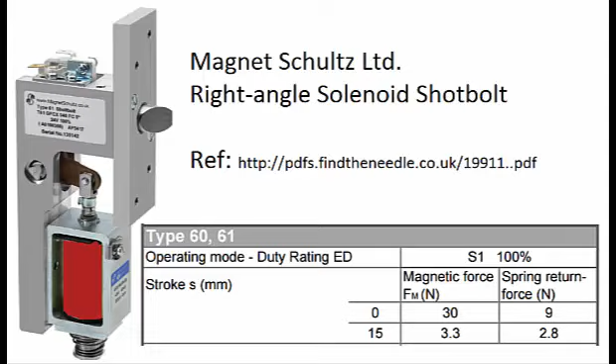So let's look at setting this up in dynamic simulation and see how we can make some adjustments and make all of this work. Let's take a look at this example of a locking mechanism.

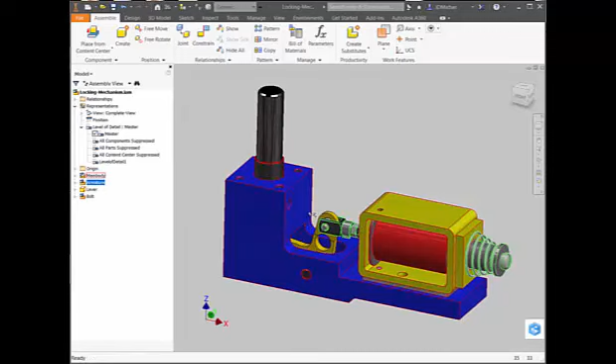So there's a solenoid, or electromagnet, that pulls on a lever which causes this plunger to pull back. When we pull on this plunger with the magnetic force, this locking mechanism opens. I've set a home position with it locked, and then when it's energized, it unlocks.

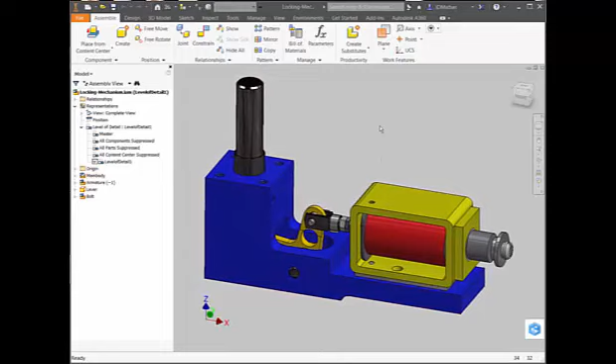I'm going to replace this physical spring with a spring force. So let's go to the model where that physical spring is removed, and then we will go to the dynamic simulation environment.

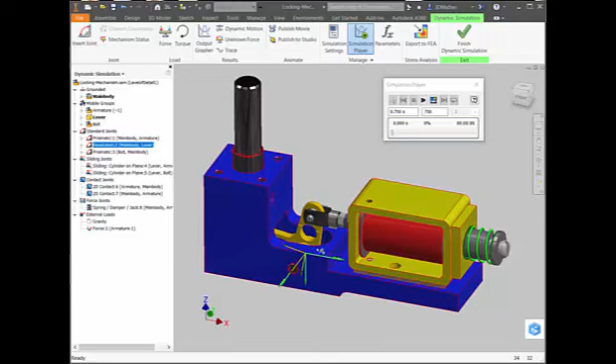I have 3 dynamic simulation joints. I have a prismatic joint for the solenoid, 1 degree of freedom, which translates along the x-axis. I have a revolution joint at the pivot point for this arm and for this lever arm, 1 degree of freedom, revolving around this axis. Then I have a prismatic joint for this bolt, so it translates or moves along the z-axis.

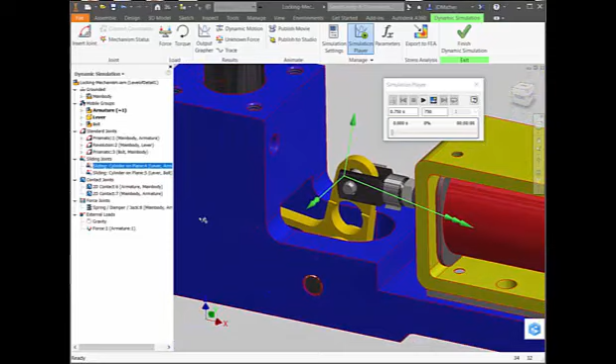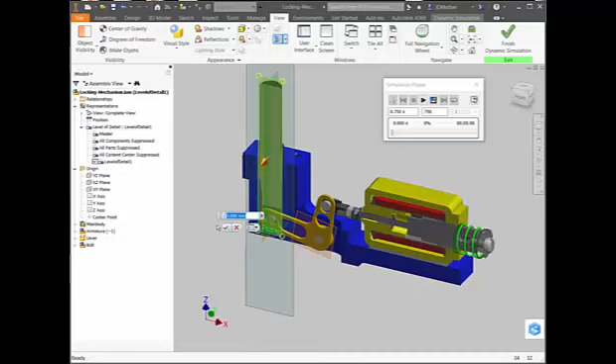I've put a sliding cylinder on plane joint between this cylinder and a plane inside of this lever, and it might be easier to see if I go to a section view. Let's go into a half section view—first I'll need to turn on some planes so I have a plane to select, do a section view of the assembly, and then turn off those planes. So I have a sliding cylinder joint up here, and then a second sliding cylinder joint here where this pin in the lock slides along that slot.

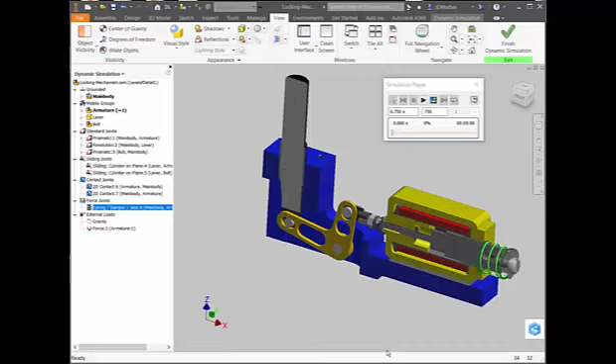I've added a spring force here to hold this plunger out until the solenoid is energized, and then it will pull that in. I've put a preload on this spring, which we'll talk about in a little bit. I can adjust the preload on the spring by decreasing or increasing the distance from here to here, and of course, in the real mechanism, you would do that by turning this screw.

I have a 2D contact to limit the motion, so that when it pulls the armature back, it only goes till it hits a stop in that direction. Then I have another 2D contact so that when the solenoid is energized, it stops when it reaches this face right here.

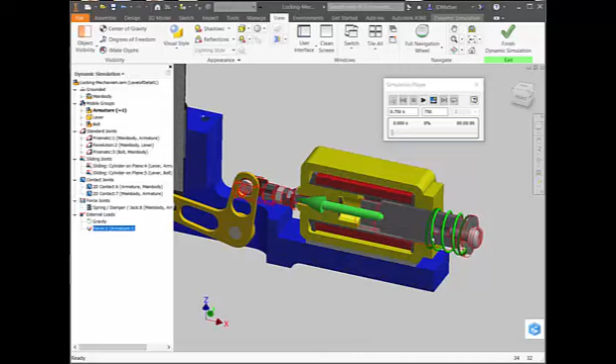And then I have the force that I put in for the magnetic coil. Let's look at those. This force is pulling in this direction. The force for the spring is going to push between this space and this space, so the end result, since this is constrained, fixed in space, is it's going to be pushing in this direction. The main body is grounded in space, so the force of the spring will push in this direction—opposite from the force of the armature that holds this closed, or the armature out when it's not energized. When the armature is energized, it pulls against it, overcomes that spring force, and brings the armature in.

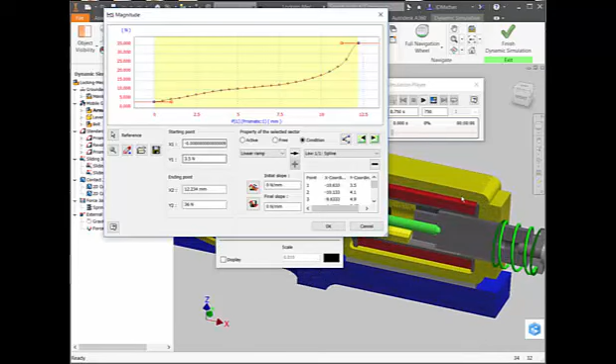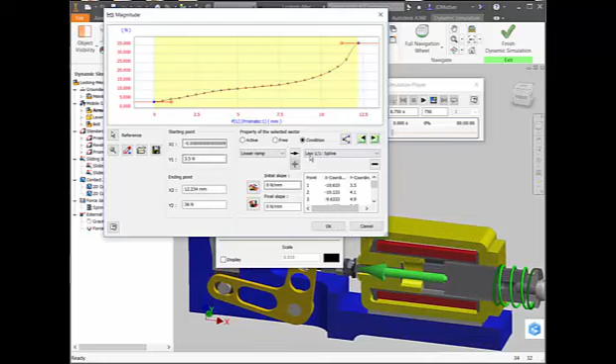Let's look at that force on the armature. So let's edit that. What I've done is brought in a spline from some physical testing—I went to a list of points, imported those points, and that gives us the curve for that force, depending on how far the armature is pulled into the solenoid. It starts out a little less than 5 newtons of force, and as I increase the distance that I pull this in, it increases up, depending on how far I pull this in, over 25 newtons. We'll look at that in more detail in a minute. I've also put a condition in here that if time is less than or equal to half a second, then that force is applied.

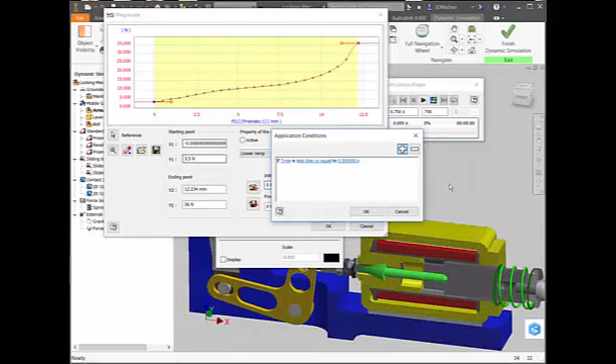Now I can change the amount of time that I want this to remain open. So if I want to give the operator a full second, 10 seconds, 20 seconds, a minute, an hour, or a day before the lock returns to a locked position, I can put in that time right here. But I have it set to half a second, primarily to keep our graph distance short so we can easily see what's happening. I will now play this, and we will see it in operation.

So I've got it set to run for 3/4 of a second. Remember, at half a second it will release, and it should go back to the lock position. So right now it's in the lock position. It'll go into the open position, and then it'll go back to the lock position. Let's go ahead and play it.

Okay, so at about 0.1 seconds it has opened fully. At about 0.5 seconds, it should then close the lock. Okay, right there. So now it closes the lock anytime beyond that. Now the first time was just to do the calculations. If I rewind this and play it again, of course it runs faster, but that isn't real time—that's the computer calculation time. The real time is 3/4 of a second, 0.75 seconds.

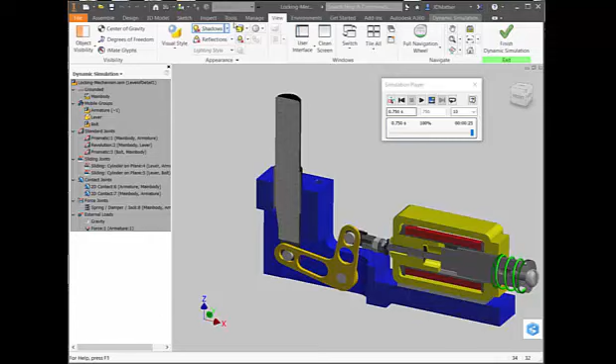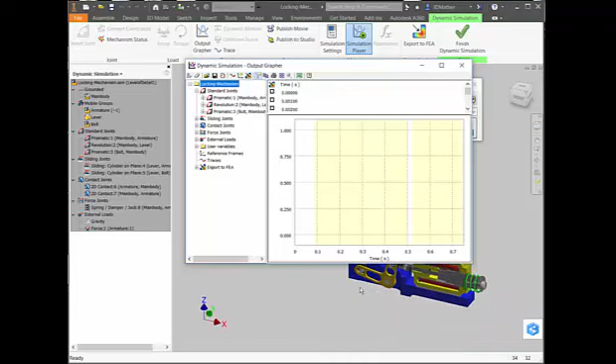Let's open the output grapher and look at some of the parameters that were recorded. I'm going to go to the output grapher, and I want to look at the distance that the two prismatic joints move—remember, I have a prismatic joint for the solenoid, and then a prismatic joint for the bolt itself. Turn on the display of the position, and so I have the position of the armature going into the main body.

That's the solenoid. I see that I start out at position 0, and then it's brought into the main body about 12 millimeters. Actually, if I search on here for search max, I can get a distance—actually 10.6 millimeters. So it's brought in 10.6 millimeters to open the bolt, and then the lock stays open until 0.5 seconds. Notice that it took less than 0.1 second for the lock to open. So if I go back and forth here, we can see that lock opening—a little less than 0.1 second for it to fully open. It stays open till 0.5, and we can change that distance, or the amount of time. Then after 0.5 seconds, the solenoid releases, which causes the bolt to come back out in the locking mechanism.

Now let's also look at the distance that the bolt has moved. So this graph shows the distance that the solenoid has moved; let's look at the distance that the bolt has moved. Now it's moving in our coordinate system, it's in the opposite direction. I'd like to see the absolute value of this, so let's go ahead and change that. I'm going to go to the curve properties and multiply -1 times that. Okay, now we have our curves going in the same direction.

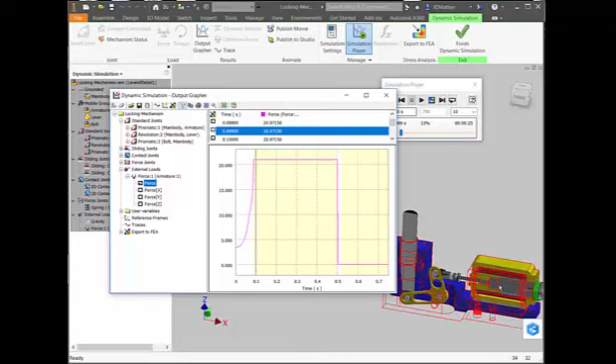Let's look at some more parameters—let's just look around here. Let's look at the force for the solenoid, and I will go ahead and check that curve and display it. So the force, we said from the spec sheet is somewhere around 3 newtons, and it goes up, in this case with the distance that we moved, to about 21 newtons. Again, we can search min and search max on this. We need this spring—the start of that spring—we need it to be a little less than the minimum force here in order for the solenoid to overcome the force of the spring.

So if I search min on this—actually I have 0 force over here, so I need to get over here. I start out at about 3.5 newtons of force that the solenoid is able to energize right at the beginning of its motion, and I need that force to be slightly more than the amount of force that the spring has going in the opposite direction in order for the solenoid to overcome the spring. So let's look at the spring force, and again my spring force is going in the opposite direction.

It would be easier for me to compare the two forces if I have them going in the same direction, so I'll put absolute value on this. Let's go to that curve properties, and I'll multiply that times negative one.

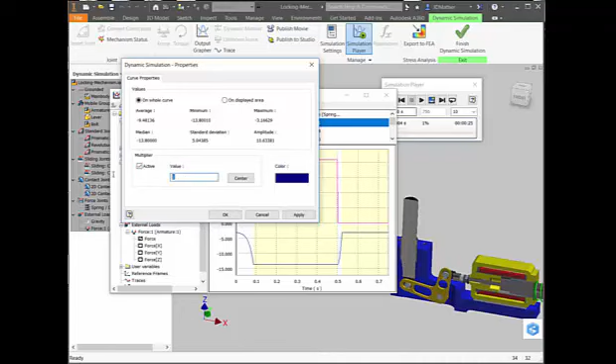I need the solenoid force to be slightly greater than the spring force, so the solenoid can overcome that spring force. When the force on the solenoid is de-energized or released, it drops back down to zero, and then the spring force goes from where it was up here somewhere around 12 newtons. That causes the spring to push the lock closed again, or pull back on this lever, and so it comes back down. Let's look at that as minimum value on the spring force.

I'm going to search min. Now actually it might be max because we multiplied it by a negative value. So this one was about 3.5 on the solenoid, that's its beginning force, and about 3.1 or 3.2 on the spring. So the solenoid has to be slightly stronger than the spring at the start in order to overcome that spring, and then stay a little bit greater than the spring as it's energized.

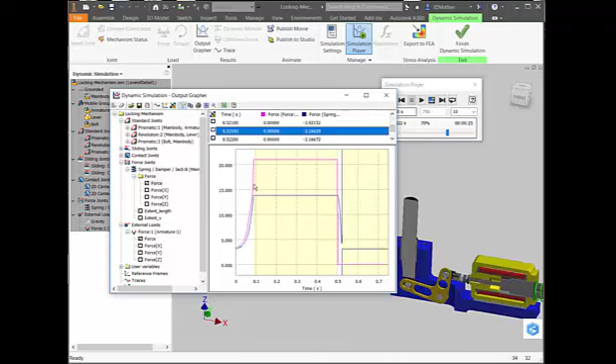From the data sheet, we can see that the magnetic force of the solenoid must be slightly greater than the preload force on the return spring, so that it can overcome that return spring as we energize the solenoid.

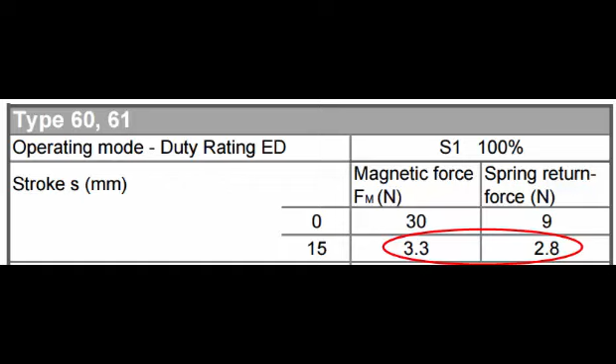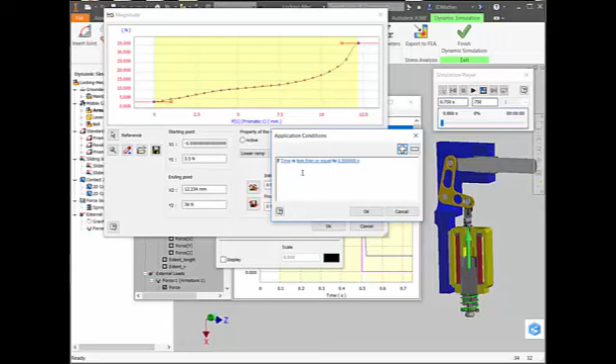Let's look at that in a slightly different way. I'm going to edit the solenoid force, and right now I have this condition turned on. Let's turn off that condition - remember the condition was to energize the solenoid for half a second. The solenoid actually becomes fully energized at about 0.1 second, so I'll turn that off, and it will stay fully energized.

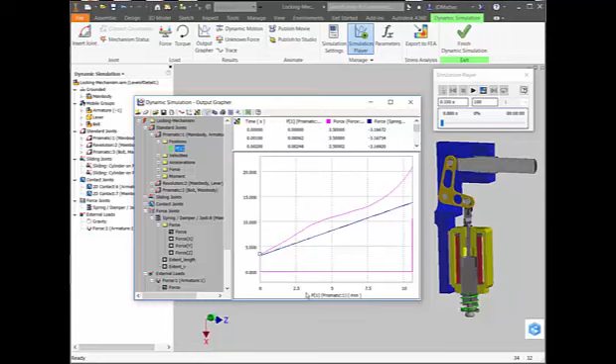Let's set our time to 0.1 second, and I want to look at the force relative to the position of the solenoid rather than relative to time. I'm going to right click on the position of the solenoid and set that as my reference. Now down here I have the prismatic, or the distance that the solenoid has translated or moved on the x-axis. Let's run it again.

Okay, so here is the curve of the force on the solenoid, and here is the curve on the force on the return spring. In this case I have used a linear spring, so the distance that I compress the spring, the amount of force is proportional, linearly proportional to that distance of compression. I could use a nonlinear spring and maybe follow more closely behind this curve, but I always want to be a little bit below the solenoid curve so that the solenoid can in fact overcome this spring.

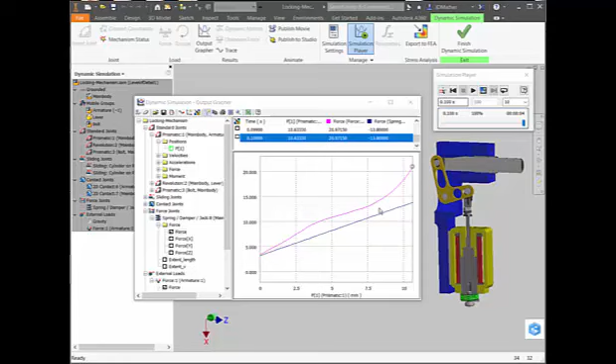But the stronger I can make this spring, if there is any binding in this mechanism, we want to be sure that spring can overcome that binding and pull the lock closed again. So the closer we can stay to the solenoid curve, the better we are. I would probably replace this spring with a nonlinear spring whose force increases as we compress that spring more and more. Now recall that we have an adjustment screw here on the end of the armature that we can use to increase or decrease the preload on this spring.

If we increase the preload, we can get this line closer to the solenoid curve, but we have to be careful that we don't pass over that curve. Or conversely, if we found that our solenoid wasn't opening, we would need to reduce this force on the preload spring or the return spring, and we could reduce that by the adjustment screw here.

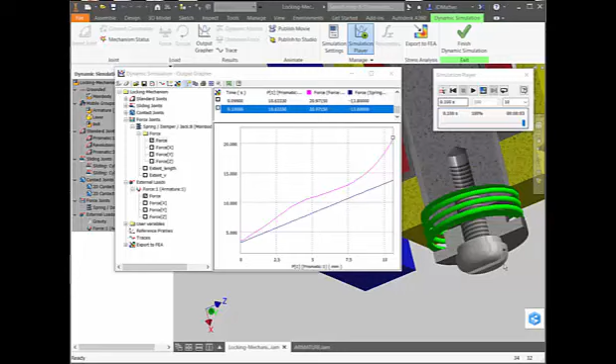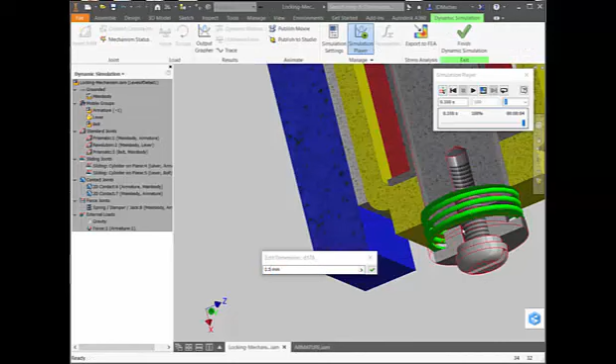If I want to increase the preload, or if I need to decrease the preload, I could increase that distance. Our spring itself is 20 millimeters long in its free state, and when we put this spring into the mechanism, it's actually about 17 millimeters from here to here. So we have a little less than 3 millimeters preload on that spring.

The spring itself is rated at 1 Newton per millimeter, and 20 millimeters is its free length. It's compressed not quite 3 millimeters, so it's a little less than 3 millimeters in its preload state.

Remember that the solenoid energizes at just over 3 newtons, so we need this spring preload to be just slightly less than the solenoid. I'll say okay to that.

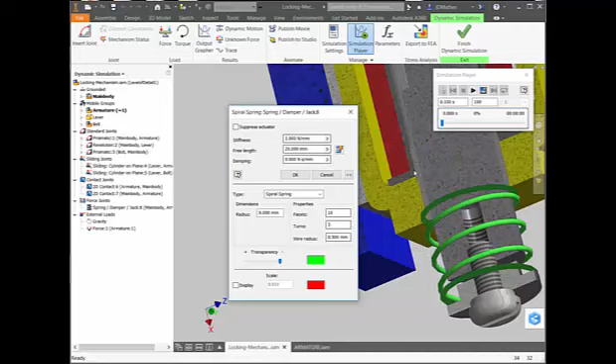Then let's adjust that preload, and I can go either way. Let's edit that, and I'm going to change that distance to 1.25. So I decrease the distance between here and here, which increases the preload. I've compressed the spring by just a bit.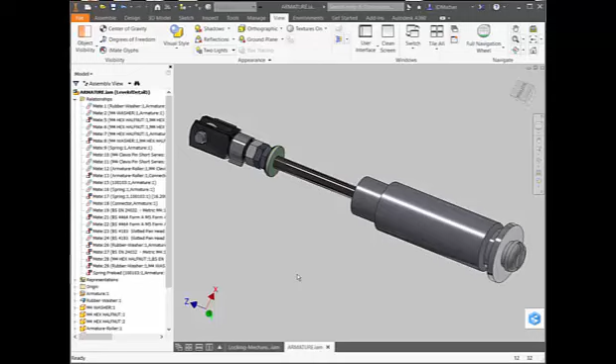So let's go ahead and save that, and I'll go back to the assembly, and let's turn our output grapher on. Again, as I play it, I want this blue curve to stay below this magenta curve. So let's play it again.

The two forces act together with each other. So we've got a force on the solenoid going this way and a force on the spring going that way. They're going the opposite direction, and it would be very difficult to hand calculate the interaction between these two forces, particularly because the spring is easier since it's linear, but the solenoid isn't linear, the force isn't linear. As suggested, I might put a nonlinear spring in here to try to more closely follow that curve. So the mathematics for that become very, very complex.

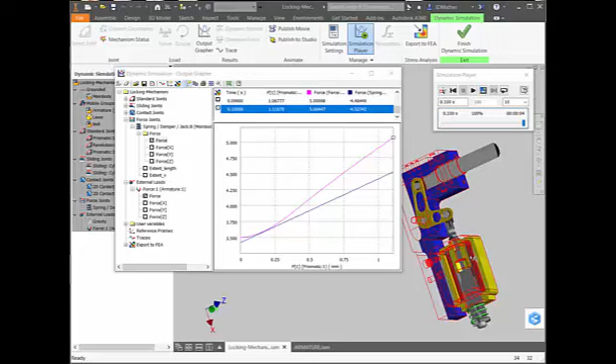Where we can do some quick trial and error substitutions and then specify the spring that we want here. We know what the specs are from testing for the solenoid, and then we can adjust the spring that we need to get our return, so that this mechanism operates even as it becomes dirty or is under less than ideal conditions. We want it to be reliable.

Now I might want to analyze how the forces interact with these other parts. Let's look at this - I have a sliding cylinder to this lever here and a sliding cylinder to this end of the lever. Let's look at those forces.

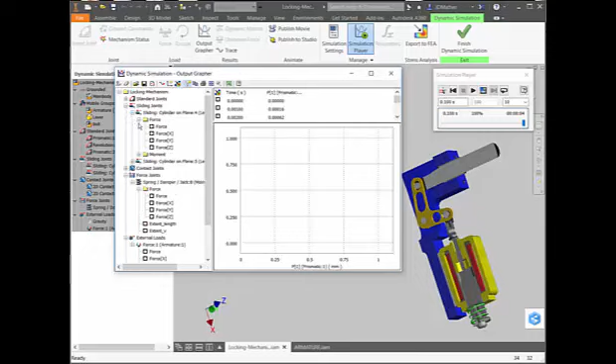So I'm going to clear the graph, and I'll go to the sliding cylinder joints, and I'll turn on the curves for the forces on those two joints. Then I see the red curve, the force is slightly higher, so actually both of them hit their high points up here.

So I'm going to search max on that, and I'm going to put a time step on, I'll put a check mark here on that time step, and the direction of the force is going in one direction here, and then it's going in a different direction over here on the other side.

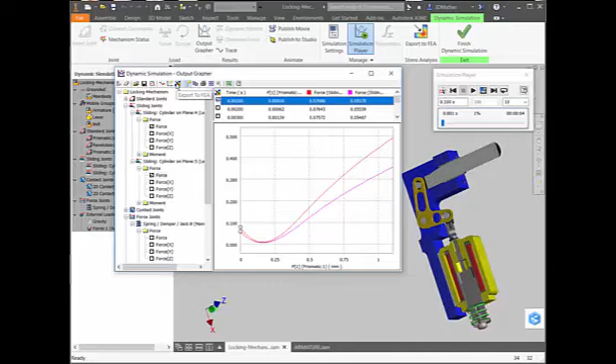So I'm going to come back here to the beginning, and I might want to put a check mark on a time step, so I can see as those forces change direction, how they interact with that part. And then I will export that part to FEA, so I will go ahead and select this part.

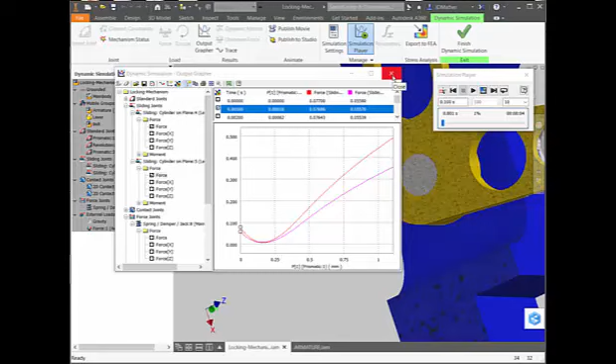And then I need to tell it where the force of the revolute joint is on that face. I'll say OK to that, and now I can go into the FEA environment to analyze this part. So I'll rewind, go back in construction, and save it.

I'll go to my environments, run a stress analysis, and tell it to create a new study, and I'm going to do a motion loads analysis. So I have two time steps that I have saved, one with the maximum force in one direction and the other with the maximum force for the opening and one for the closing.

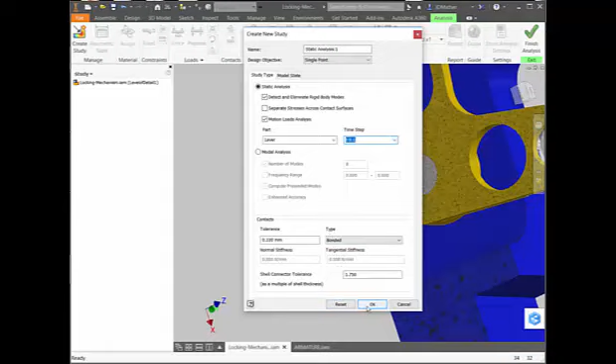So let's go ahead and look at this one. This one was the higher forces, and I will say OK to that. Okay, so we have these various forces that were applied, including some twisting forces that we might not be aware of if we were just doing some hand calculations, pushing against this and pushing against that face. We might not be aware of these twisting forces.

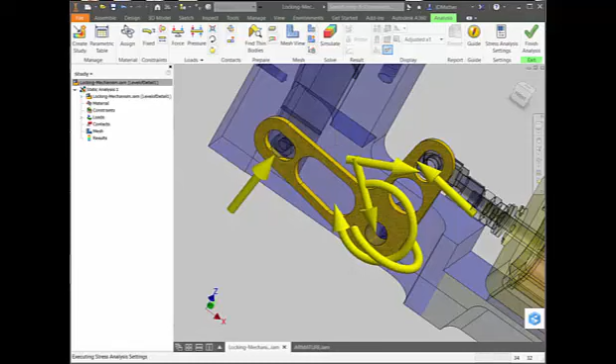Let's decrease the size of those glyphs a little bit so that it looks more appropriate for our model, and then we'll run our simulation on that part. I might want to leave the section visibility on while doing this so we can see the entire part, and then we will go ahead and run the simulation.

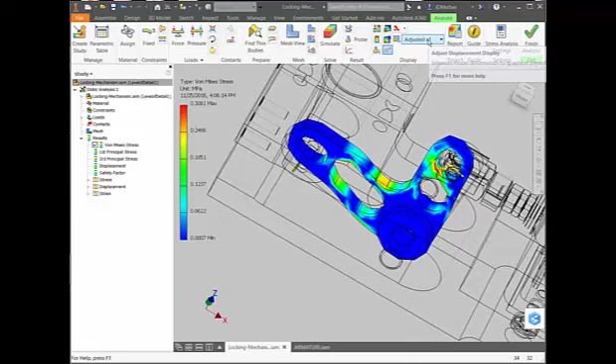And on our initial run, okay, keep in mind that we're looking at an adjusted representation so that we can more easily see the results. I'm going to put that on actual, and so let's look at our safety factor first. Our safety factor is beyond 15.

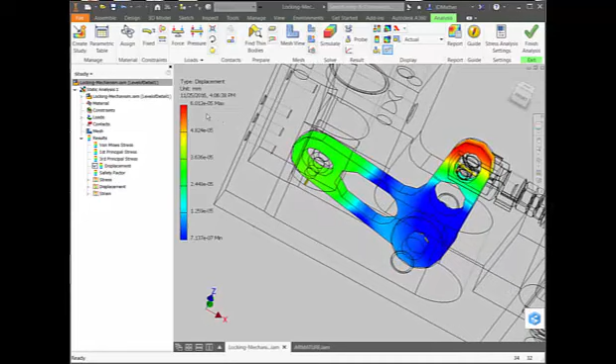If I want to look at our displacement, then our displacement on this part is 10 to the negative 5 millimeters. So that's a really tiny number. So maybe we could experiment with reducing the weight on this part, or the mass, by removing some of the material. We can see that it's way over engineered for the purpose that we need it to perform.